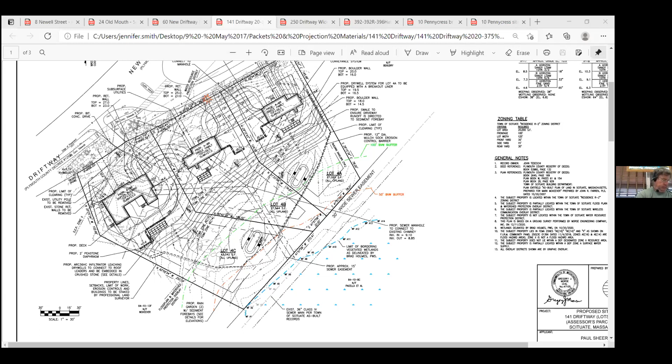On May 17th, 2021, 5:30 PM, the Town Hall, Scituate Conservation Commission will hold a wetlands hearing under Chapter 131, Section 40, Massachusetts General Laws, and Section 30700, Town of Scituate Code of Bylaws, regarding the application of William and Margaret Whittier Trust for work related to a septic repair and a dwelling at 24 Old Mouth Road, Scituate. Abutters and other interested parties are invited to attend. Information to access the meeting will be available in the agenda posted on the town website.

So we have Morse Engineering for this one. Good evening, again for the record, Gregory Morse, registered engineer. I'm representing the applicant, William and Mary Whittier Trust. This is a septic system upgrade project located at 24 Old Mouth Road.

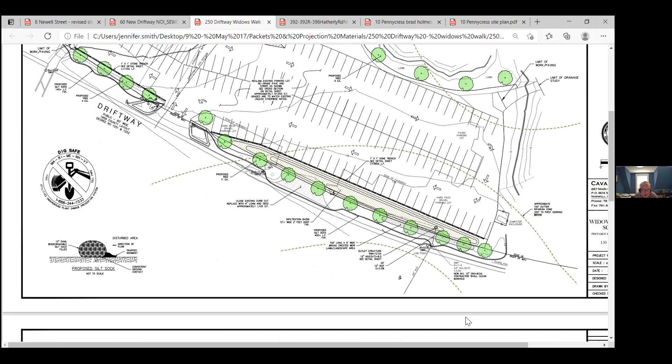Okay. Well, I get the difficulty with the TSS, and like you say, it seems like there's an awful lot of improvement compared to what we had. But why don't we let Greg on if you can.

We got another engineer's comment. Can you hear me? Greg, you're on. Great, thank you. Brendan, this plan looks great. As a citizen of town, thank you for drawing it. I just have a question as it relates to the planning board approval.

Because I believe this plan is significantly different than what they approved, being that you eliminated the second access. In the access way on this plan, you have cars coming in on the left-hand side of the road and exiting on the right-hand side. It's completely backwards. Is that going back to the planning board for review? That's my main concern, the access way. Yeah, I actually didn't pick up on that myself.

It's not, I don't believe it's going back to the planning board for their review, because the original parking space count doesn't trigger a site plan review. There were 152 spaces shown in the original approval, and we're showing 156, so we're increasing it by 4 spaces. I think 5 or more triggers a site plan review through planning board.

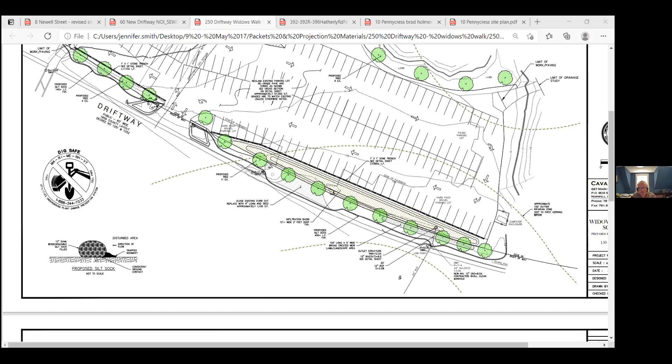Now we're on to 60 New Driftway. On May 17th, 2021, 5:30 PM in the Town Hall, the Scituate Conservation Commission will hold a wetlands hearing under Chapter 131, Section 40 of the Massachusetts General Laws and Section 30700 Town of Scituate Code of Bylaws, regarding the application of the Riverway Condominium Trust for work related to connecting 26 residential units to town sewer and decommissioning unused components of an existing sewage system at 60 New Driftway, Scituate. Abutters and other interested parties are invited to attend. Information to access the virtual meeting will be available on the agenda posted on the town website.

Good evening. What do we have for that? CHA? Looks like we have Scott Arnold. Hello, good evening. Can you hear me? Got you, okay great. For the record, Scott Arnold from CHA.

We are before the commission this evening, having submitted a notice of intent for the property at 60 New Driftway. This is the Riverway condominium location. The site has 7 existing buildings that house 26 condominium units, and it's now served by 3 separate Title V septic systems. The project involves connecting all the units to the existing town sewer located in New Driftway. Since the site is much lower than the street, it would involve installing 2 separate grinder pump stations and force main up to the street and to the existing gravity sewer in New Driftway.

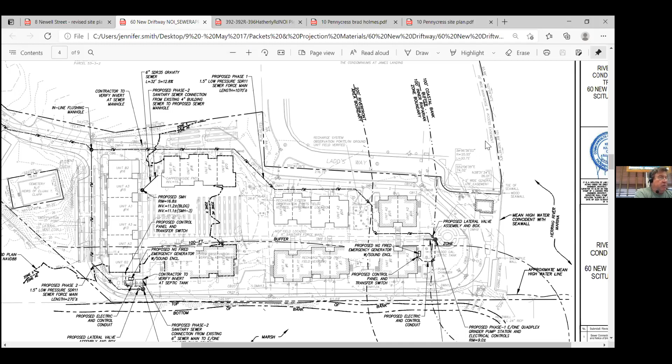Is that the easement where the cursor is now? Yeah, so I'm seeing that easement, but that's for the condos at James Landing, and I'm just wondering why that doesn't continue.

Penny, do you remember that? Yes, I definitely remember that. Right in front of where the sidewalk is, that is a public easement, at the water's edge, whatever you want to call it. Yep, that's a public easement, and it should say on the plan.

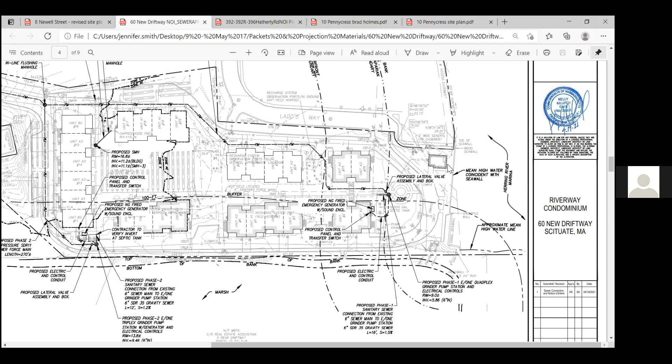Well, that would be something I could certainly get the answer to. Okay, Amy, that's important, do we want to add a condition making this pending receipt of a revised plan that reflects that easement? Yes, I think it's important that it show accurately.

All right, so I'll take a motion. I make a motion to close with the stipulation that the order asks for that easement to be on the plan. Do I have a second? I'll second that, Brendan. Great, thank you, Brendan. So all in favor? Jen, yep. Andy, yes. Frank, yes. Great, thank you very much.

Where are we? 8 Newell Street.

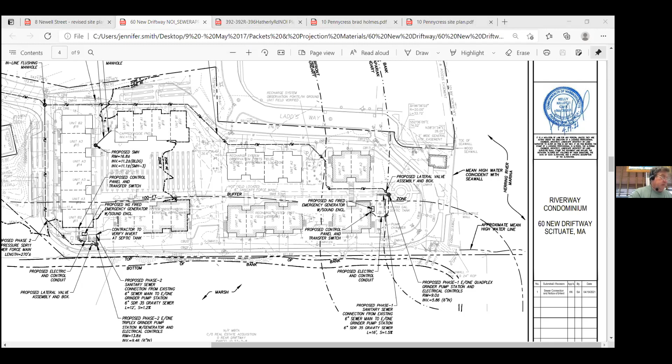Christopher, do we have anybody on? I'm unmuting Chris. Chris, you're on. Hi folks, Chris Wynn here from Newell Street. Attorney Jeff DeLisi, I believe, is also on the call. Jeff, are you available? Thought he was on. Can we do the doc one first and give Jeff a couple more minutes? Sure.

We have somebody from Grady. Yeah, Paul Seberg, Paul, you on? Yep, Paul's on, hey, Paul Seberg from Grady Consulting here. Hey Paul. You want to bring us up to date on that?

Right, so the latest plan is going to be the 8/24 version. I know we submitted some revised plans on 11/12/20, but we actually circled back to the original plan presented to the commission on 8/31/20. The reason being that worked out best for the location of the existing moorings, which was the main concern of the commission at the last hearing. Since then, Chris has been working with the mooring owner out there and has come to an agreement with him to adjust it as needed to accommodate his float.

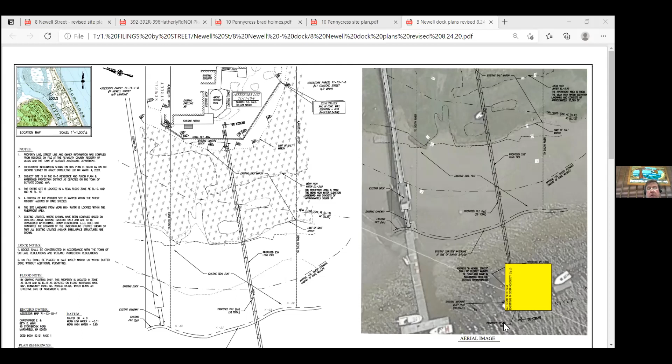I don't know, Chris? So it is actually on the plan right now. It's basically we're showing to relocate that mooring. Okay.

Well, if it's helpful, I could share my screen and show you the text stream going back and forth within the last 15 minutes. No, that's all right, we don't need that. We've got it on the plan. I think Penny's made a good motion. Do we have a second?

Second, Andy. Okay, so all in favor? Jen, yep. Brendan, yes. Frank, yes. Okay, thank you.

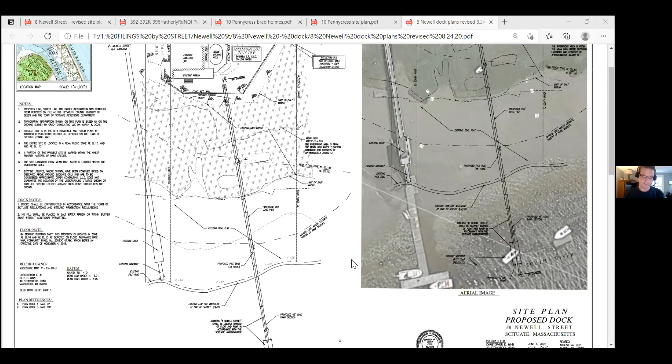All right, so did we get Jeff DeLisi on? I don't see him on. Is he on under another name, maybe? Can we jump to Hatherly Road and then see if you find him? Why don't we do that? Okay, I'll go on mute and try to track him down. Okay, so I'm gonna do 392, 392R, and 396 Hatherly Road.

On May 17th, 2021, at the 5:30 meeting, the Town Hall, Scituate Conservation Commission will hold a wetlands hearing under Chapter 131, Section 40 of the Massachusetts General Laws and Section 30700 Town of Scituate Code of Bylaws, regarding the application of Peter and Evelyn Finnegan for work related to an invasive plant management plan at location 392, 392R, and 396 Hatherly Road, Scituate. Abutters and other interested parties are invited to attend. Information to access the virtual meeting will be available on the agenda posted on the town website.

And I think this is Brad Holmes. Brad Holmes is on. Great. Good evening, members of the commission. Brad Holmes with ECR, presenting this notice of intent for the three properties at 392, 392R, and 396 Hatherly Road. We've submitted a vegetation management plan to work on the invasive plants that are on and near the site.

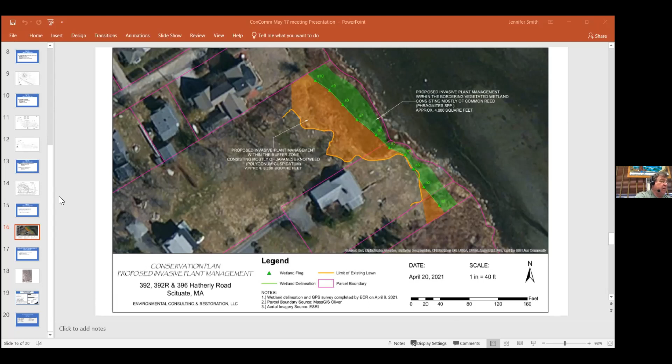Did we hear back from 8 Newell Street? They found Mr. DeLisi somewhere. Yes, okay. Can we hear from him?

After our last hearing, there was a reference made to email correspondence with CZM, Rebecca Haney over at CZM. I was able to take a look at that correspondence, and it dawned on me that Rebecca did not appear to have the benefit of all the information. I think when Amy first communicated with her, it was prior to Mr. Zimmer's involvement and his mitigation plan. So I reached out and spoke with Rebecca and explained what is happening on this property - that this is a previously altered site, significantly previously altered site that contains a pre-existing pool, and that the buffer enhancement area was proposed to be 4-to-1 enhancement to alteration.

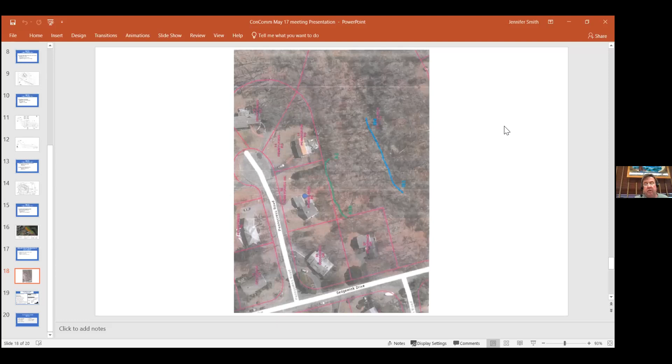So now, certificates of compliance. You're good with Pondview Ave? Yes, okay. And order, actually I wanted to add a couple others to it. Say that again. Yeah, we have another couple that are gonna go out too. Oh, I know, 33 Common and 47 Penfield. We're also gonna get issued. Those were both septics also. Okay, good, okay.

We're trying to churn out high volumes of paper, you can see. There's no lack of things to do. Well, I mean, the amount of trees we cut down for being a conservation office is kind of ironic, but anyway, and then orders, a couple sets of orders to vote on.

I make a motion we accept the orders for 117, 119 Edward Foster as written, and why don't you do the - I can't pronounce that - 12 Carnsley Lane. Isn't that Carnsley? Carnsley Lane. Thank you. Okay, so I got a motion, how about a second? Second, Andy. Thanks, Andy. All in favor? Jen? Yep. Brendan? Yes. Frank? Yes, thank you.